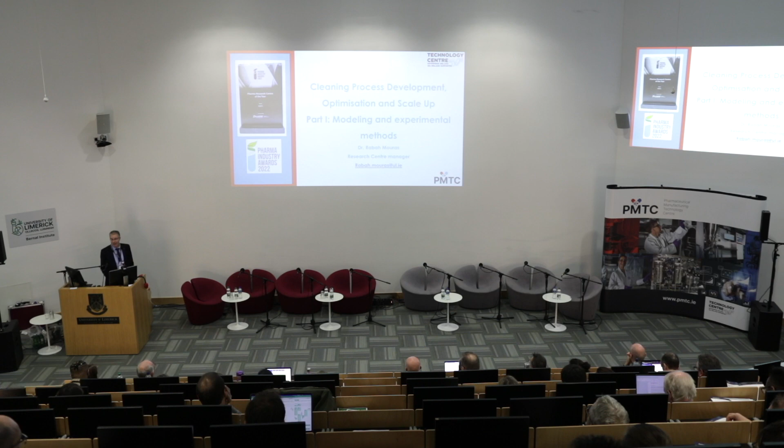My talk will follow this outline: the cleaning theme and the impact we've achieved, the cleaning core project Spotless, and a few words on the PMTC Good Cleaning Validation Practice Guide, finishing with the conclusion.

A few years back we had a survey that shaped our cleaning themes within the centre. The question asked was: what issues are facing the pharma industry in Ireland? There were three themes - cleaning, process, and data - with cleaning coming out on top at about 44%. So I'll just focus on the cleaning theme.

We'll talk about how we use fundamental science to help our industrial members develop more efficient and sustainable cleaning processes, and then how we do process optimization and scale-up.

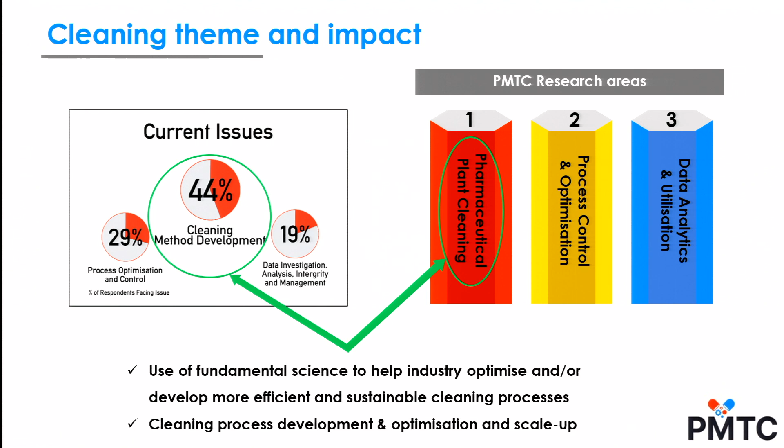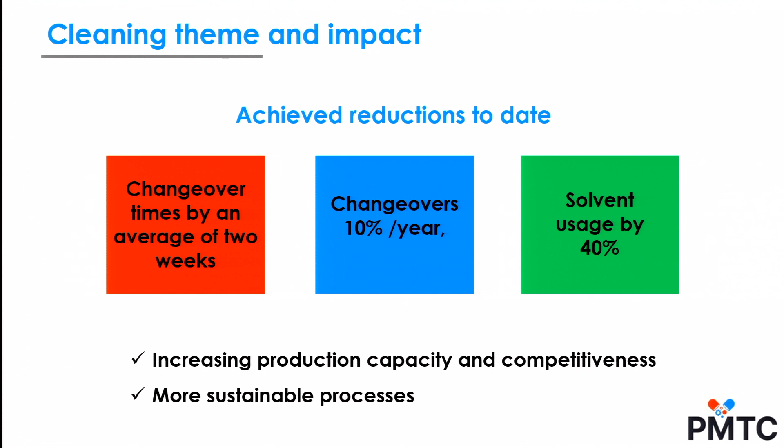Through the years we've achieved great impact. We reduced changeover time by an average of two weeks, and changeovers by about 10% in a year. We've also been able to reduce solvent usage by about 40%. These outcomes have made a great contribution to increasing production capacity and competitiveness of the pharma sector, feeding straight into more sustainable and efficient processes.

I'll go through our core project and tell you how we achieved those impacts. As Sarah mentioned, there are many funding streams and ways to collaborate, including Enterprise Ireland funding and contract research, as well as using research components from our members to do the core research.

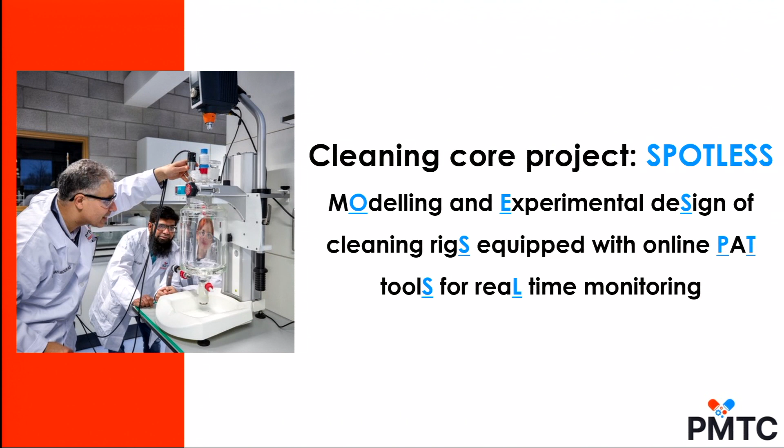Spotless was one of the first approved projects in this phase, which is about using modeling and experiment to design cleaning rigs, where we can do optimization and study all the fundamental sides of cleaning, and then how we introduce and use PAT tools for real-time monitoring and verification.

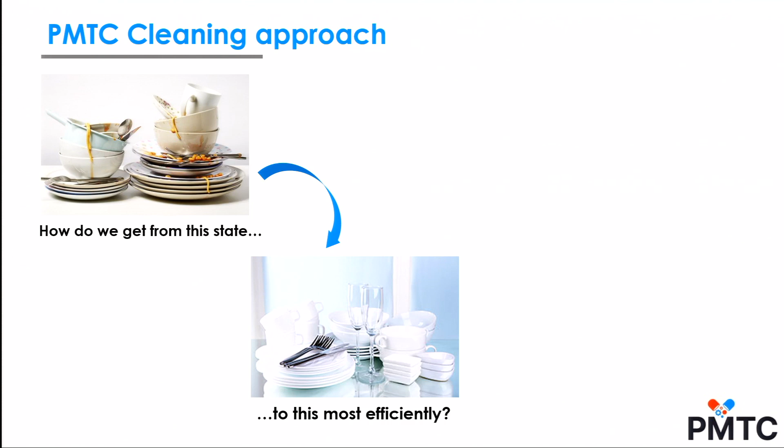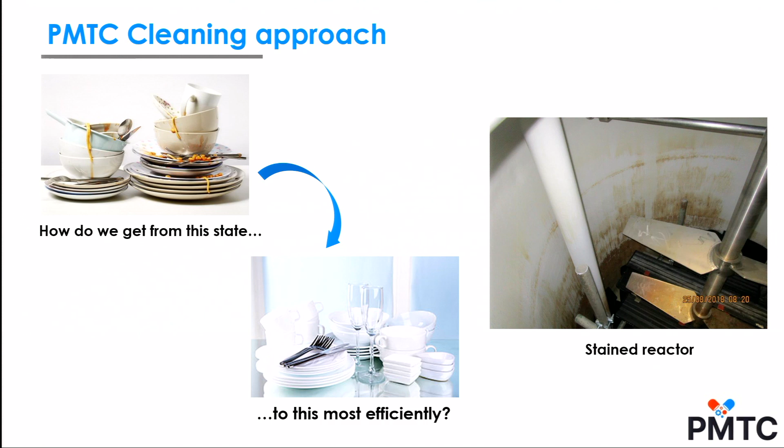So cleaning, our approach in PMTC, is how to go from this state to this one most efficiently, in less time. So that's in a restaurant or a kitchen, but in real life, this is what you can get after a process. You have dirty vessels, and they have to be cleaned efficiently, while also looking into safety issues.

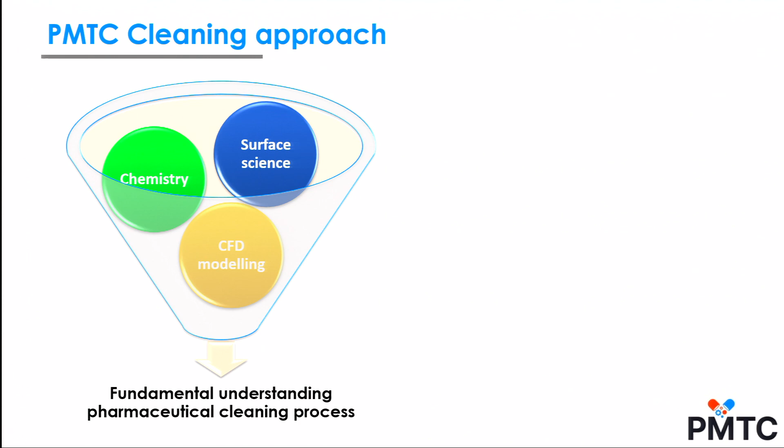Our approach in PMTC is built on three pillars, to have a fundamental understanding of pharma cleaning. First, we look into surface science: how the surface of equipment and different materials interact with residues, and how those residues adhere and can best be removed. We also look at the chemistry, either of the residues we're trying to clean or of the cleaning agents, whether organic solvents, detergents, or aqueous solutions. And we use CFD modeling to find the best way to deliver those cleaning agents, including flow rates and cleaning times.

We start our methodology with modeling, screening for the best cleaning agents based on solubility using computational techniques like COSMO or Hansen solubility parameters for fast screening. Then we use CFD modeling to inform the optimum delivery methods. After selecting the best cleaning agents, we move to the experimental side: we measure solubilities, characterize our residues, and run cleaning trials to see if our recommendations achieve what we wanted.

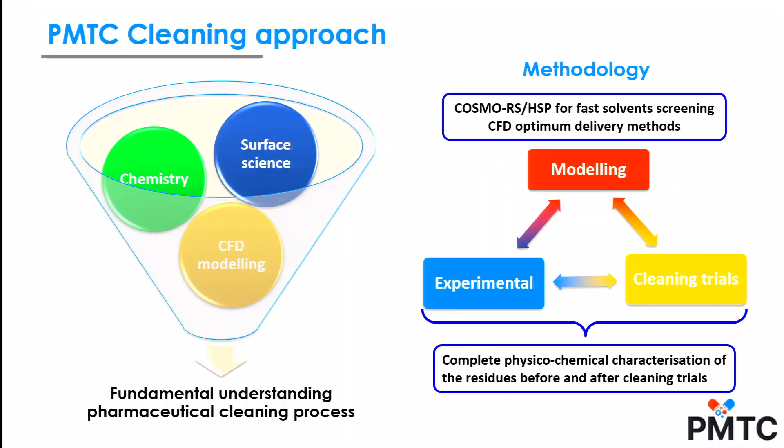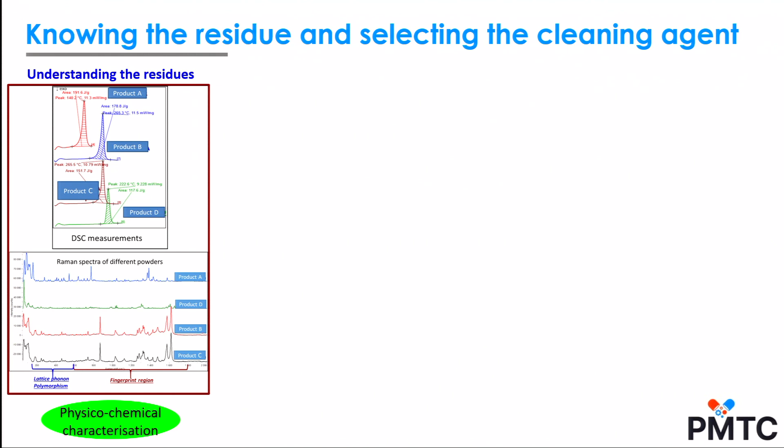We have the privilege of being at Bernal and the University of Limerick, with access to some of the world's best state-of-the-art characterization suites, allowing us to do complete physical-chemical characterization of residues before and after cleaning trials. We like to establish a time zero - we stamp and characterize exactly how our residues look initially, so we know that baseline.

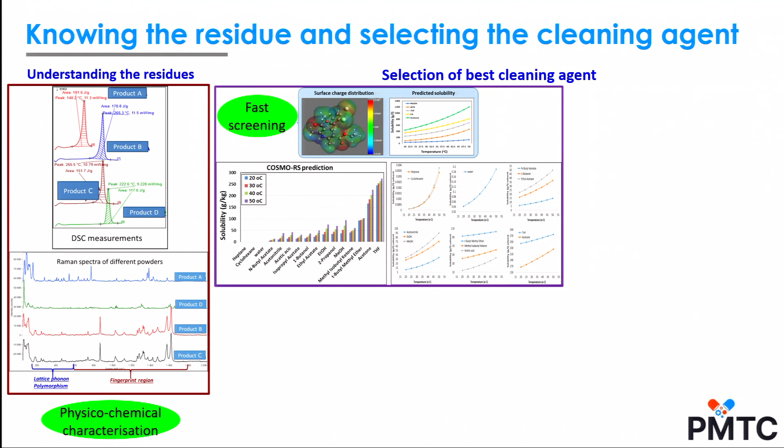We do our selection and screening for the best cleaning agents based on solubility, and we can see a trend using temperature - solubility may increase by a factor of 2 or 4 moving from 20 to 30, 40, or 50 degrees, if that's usable in the cleaning process. We take our measurements as usual, select solubilities, and check stability, because it's important to keep the integrity of the residue. If there's degradation or chemical reactions, and we're verifying using offline methods like HPLC, we might end up looking at different molecules entirely, so we have to ensure there's no degradation happening.

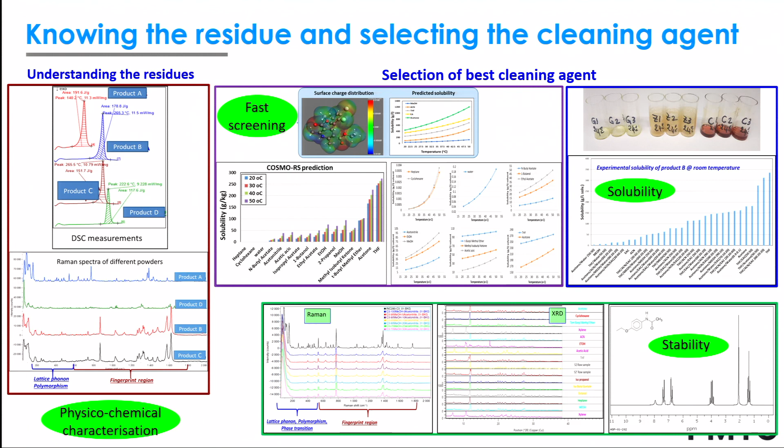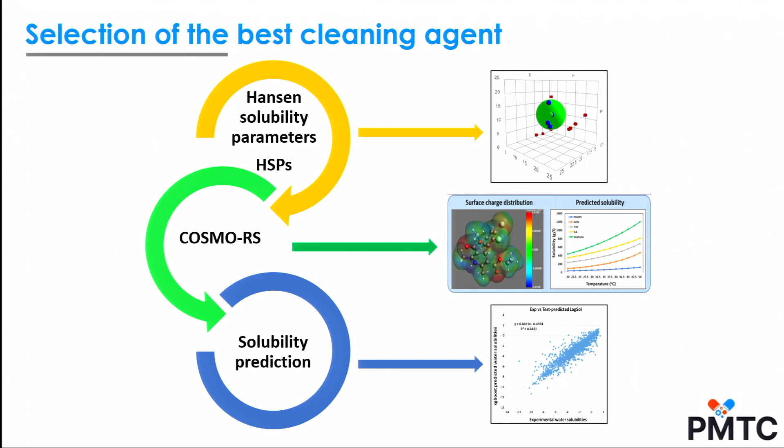One objective of the Spotless project is to find a way to build a model that helps us cluster all the chemicals and solvents, so that before going to the lab and doing experimental measurements, we can predict solubility and cluster chemicals in a more efficient, accurate way. We achieved that during this project - we're able to predict the solubility of residues of chemical entities with 90% accuracy, just by looking at the physical-chemical properties of the molecules, without doing an experiment.

I can show you the results here: predicted versus computed values, with an R-squared of about 0.91, which is a great achievement. In the middle figure, you can see we classify a good number of molecules according to their solubility using the pharmacopoeia scale, going from slightly soluble to very soluble. That was really good.

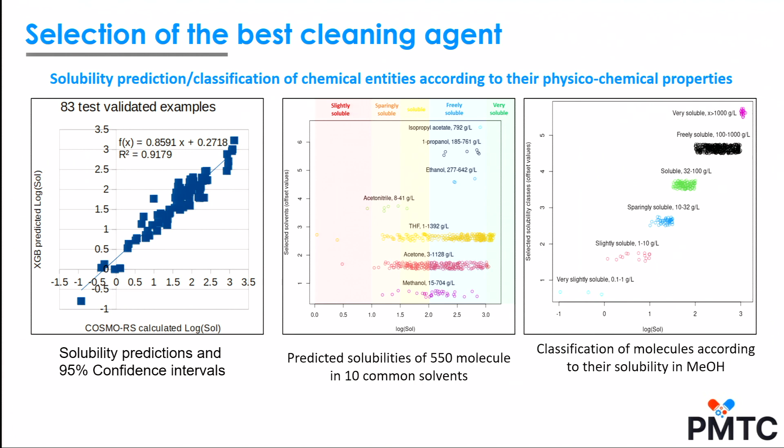We did this for over 550 molecules in 21 solvents, though here we've selected just 10 common ones used in pharma for cleaning or processing. For example, if we wanted to use methanol for cleaning, we can cluster molecules according to their solubility, giving us a great idea before going to the lab for selection. This saves huge amounts of time in optimizing cleaning methods.

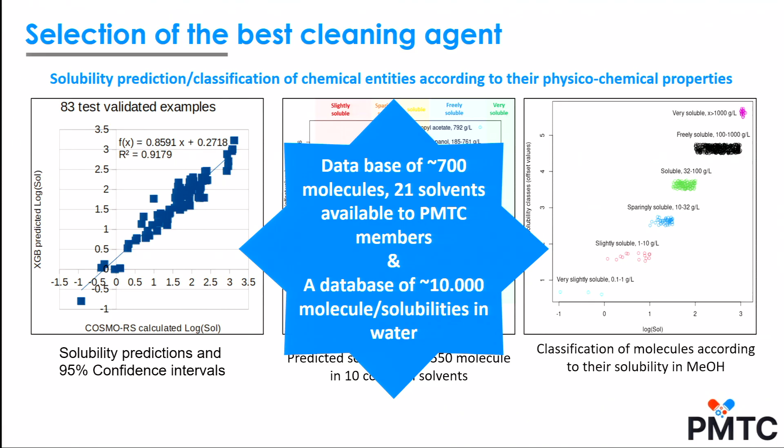We already have a database of 700 molecules in 21 common solvents used in cleaning, and these are available to our members through the Spotless project. We also built, as a test and validation of the database, a set of over 10,000 molecules used in simulation, but in this case we just used water. It's possible to do the same thing for organic solvents.

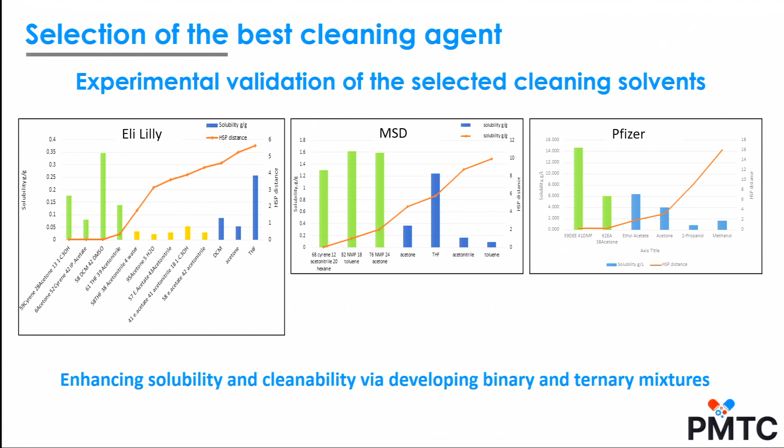After that selection, we go and validate that experimentally. We did that on a few molecules from our partners, and we showed there was enhanced solubility and cleanability of those molecules. I'll show later the cleaning trials via developing mixtures using binary and ternary systems.

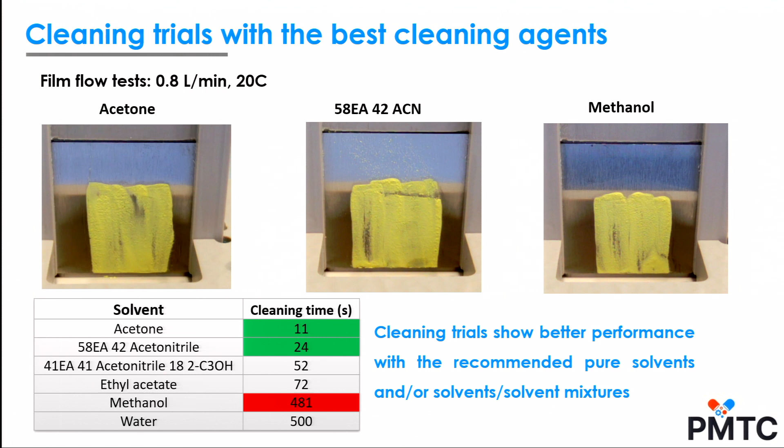After we select the cleaning agents that we think are the best, we do our cleaning trials. What you can see here is that the recommended cleaning using the modeling and the experimental are outperforming methanol, which is the common organic solvent used in cleaning.

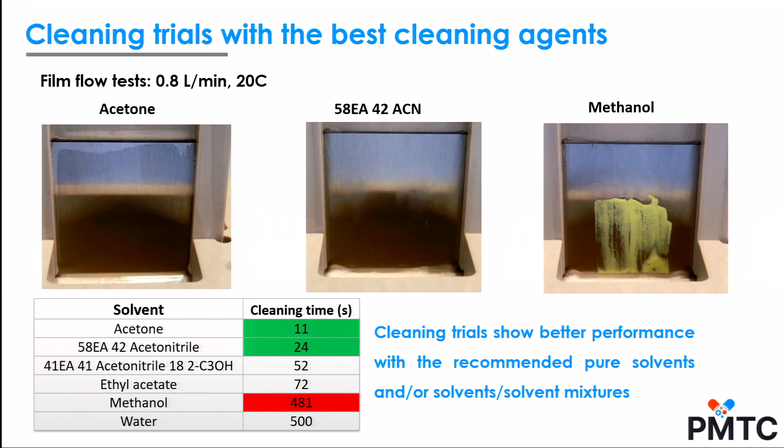You can see we clean the coupon using acetone in 11 seconds. The ethyl acetate and acetonitrile take 24, but methanol took about 44 times longer, 481 seconds.

The other objective of Spotless was the development of an online technique to monitor and verify the cleaning in real time. We tested different techniques using UV-Vis, Raman, FTIR, and NMR, and found that UV-Vis is the best tool to use because it's the most sensitive, with a low LOD of 0.1 ppm and LOQ of 0.4 ppm.

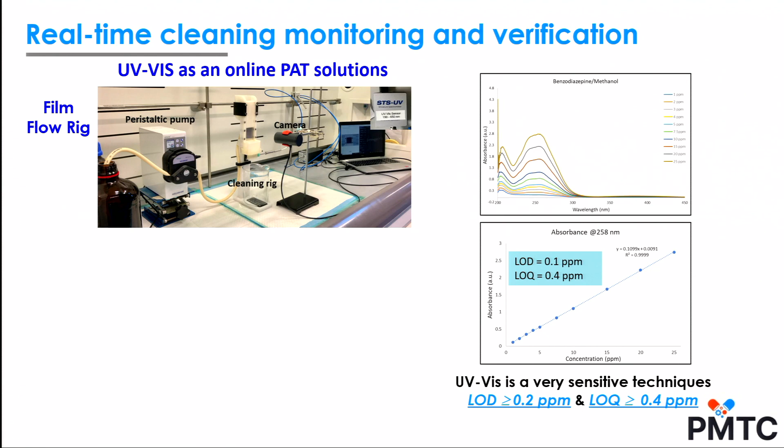So we opted to use that, and we designed our cleaning film flow rig using CFD, thanks to OREST for providing all the data on scale-down, to have the right size of coupons and the right flow rates that can be scaled up later on and used in plants for cleaning big reactors.

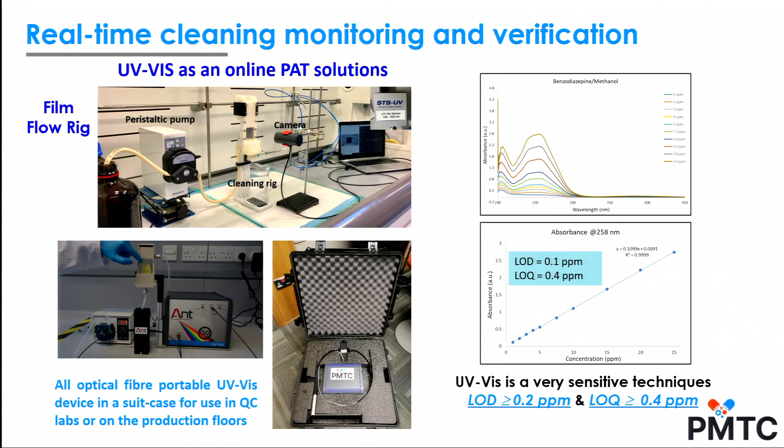It can be used in the QC lab, or taken out on the floor for cleaning verification and rinse recovery as well, depending on the application you'd like to use.

I'll give you an example of how we use the film flow rig combined with PAT for real time measurement. While we are cleaning, we measure at the same time the concentration of the dissolved molecules, reading it in real time. This gives us a profile, which we integrate to get the amount cleaned.

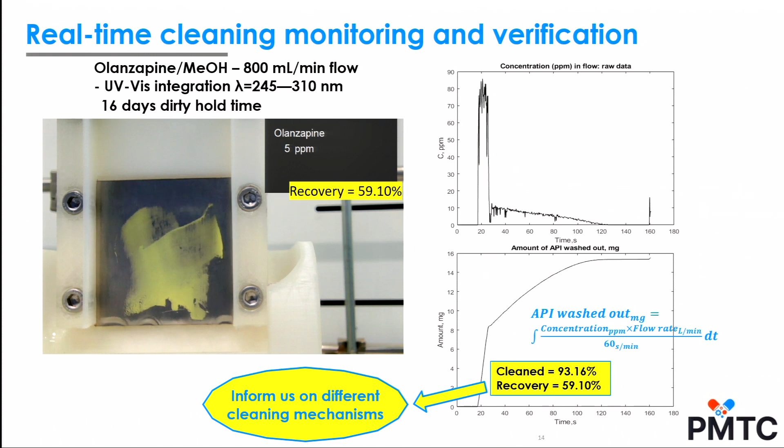What I've seen is there's a lot of lift-off, which may happen in the gross clean. So we developed another technique using an optical camera to quantify both how much we remove by dissolution and how much we remove just by shear-off. Nicholas will talk more about that, since he used it for optimizing the cleaning parameters.

Of course, we double check every time that there was no effect on the molecules: no degradation, no coloration, no polymorphic changes. We can use a fast measurement with Raman straight away, which takes a few minutes, or go to the SEM to get more detailed pictures and confirm nothing has happened. So this is our learning curve in the lab, but we would like to optimize that and take it further to be applied in the plant.

As I said, we use two techniques. The first is CFD modeling, and the team working on that helps us design flow rates, wettability, and estimation of cleaning rates by dissolution in film flow, with the outcome used for scale-up. In analogy to the Sinner circle, we can also optimize this using the film flow rig, where we can change different parameters.

We can vary the mechanical flow rates, or the chemistry, different concentrations or different combinations of organic solvent, or maybe the temperature. This allows us to find the sweet spot where we can use less time, less detergent or less organic solvent, less heat, and get the best outcome.

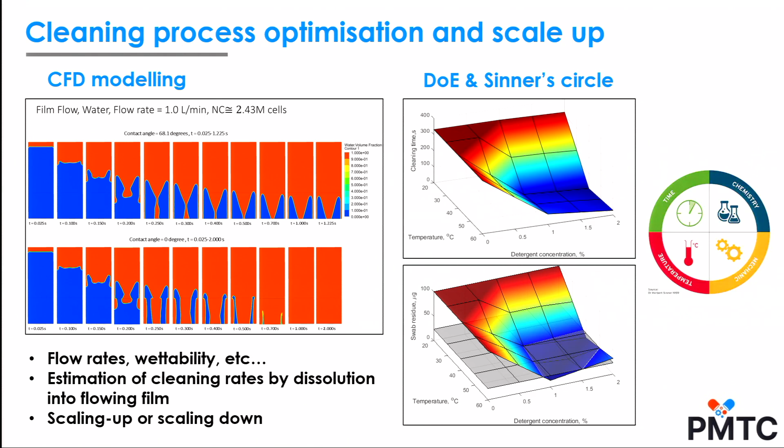If you see on the second figure here, with those optimized parameters we've been able to clean at less time and low temperature, 20 degrees, less concentration of detergent, and we are below the VRLs that we have measured in the lab.

And once we have done that, we have to scale up, and we use the pilot plant, a CIP rig, and Sarah has mentioned that.

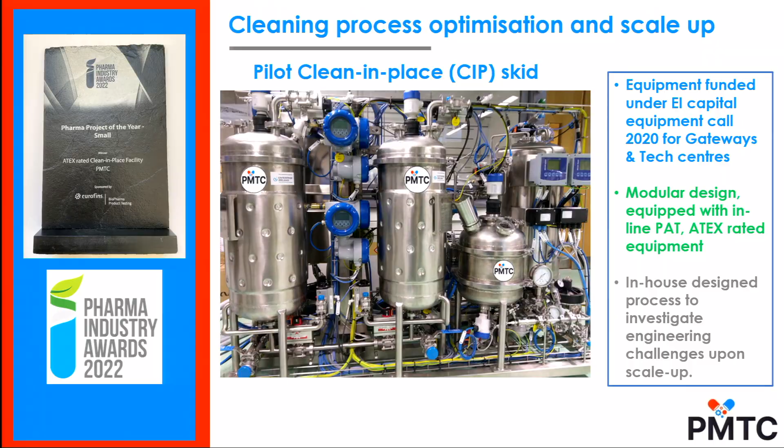We're really proud that this project won the Pharma Award. Thanks again for the funding from Enterprise Ireland that allowed us to acquire this unique facility, which we offer to our members to access, either to optimize their cleaning methods or to develop new cleaning methods, using the film flow rig and then scaling it up to the rig, which is modular and can accommodate different types of cleaning agents and different materials.

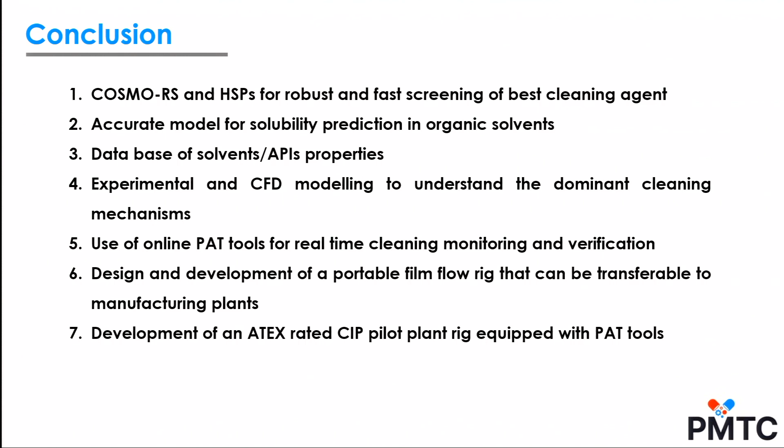Finishing up: we have developed a database for clustering chemistries and cleaning agents that is accessible by our members. We have combined CFD and experimental work to understand different cleaning mechanisms. We use PAT technologies, and we have designed a film flow rig. We are using it here, but we are happy to give it to our members if they want to use it in their plants to design their own cleaning methodologies. And of course, lately, there's the design of the ATEX CIP rig that's also accessible.

Big thanks to the PMTC team, our Spotless members, industrial members, as well as the people who have worked on the guide, and thanks to the funders. Thank you.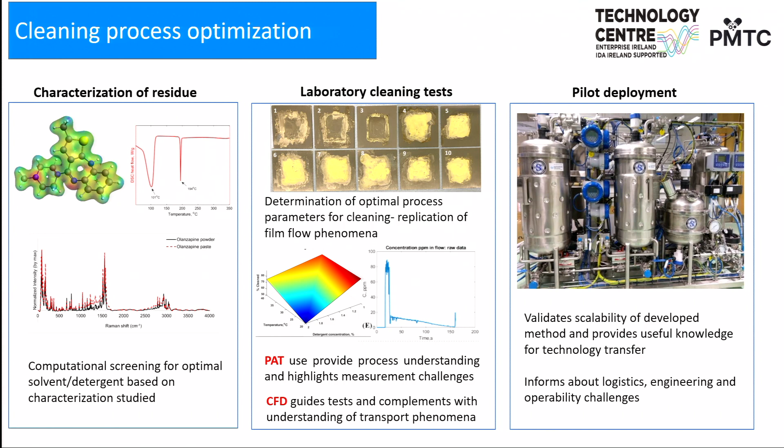I'm talking about, for example, deposition of sediments in the pipes, foaming in the tanks, the effect of different pumps, crossing in the valves, etc. There's quite a lot of challenges that might happen upon scale-up, so that's a very useful tool for us to validate that what we're developing or proposing to industry can actually be easily replicated on a larger scale.

Speaking a little about the bench scale, we started off with the first picture on the left, which is a dipping test. That's a very gentle cleaning testing technique where we screen purely for the chemical action, so just temperature and solubility or dispersibility. We have steel or material samples, called coupons, that we coat with an API or a chemical entity, and we dip them gently in different cleaning agents at a set temperature. That allows us to compare the chemical action of each.

That's a very fast screening technique, but it's just an informative first step. It's not really replicating what happens inside a process vessel, let's say under CIP conditions.

So then we move next to the film flow, where this film flow cell was actually designed to replicate the film flow that happens within CIP. Basically it's a falling film that develops on a vessel wall, and that's the weakest mechanical phenomenon happening in a CIP vessel, because you have the jet coming from the spray ball, and then you have the film flow falling on the walls, and that's the weakest part, so that's a bottleneck for cleaning. If we investigate this, it allows us to optimize the whole process.

We use in situ PAT and visual analysis to also help us understand different mechanisms governing cleaning. CFD also complements this work. It gives us information on the transport mechanisms and guides us a bit on how to select the best flow rates and what flow profiles we get.

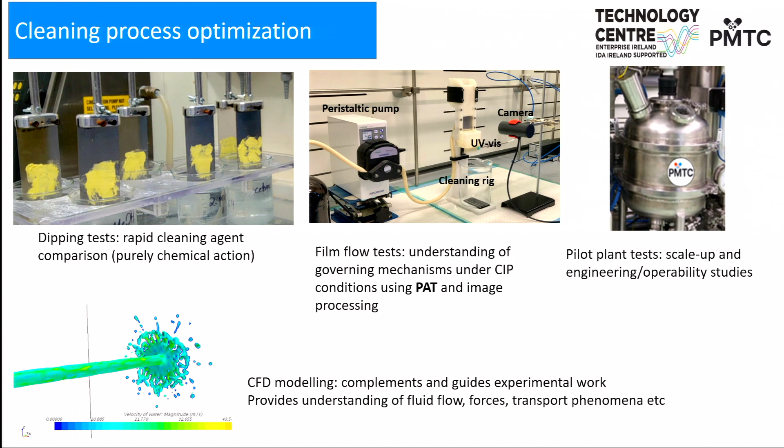I'm showing as an example here a snapshot from a CFD simulation by Aris and Mohsin, which shows you what happens to your shirt when you try to wash a spoon in your sink - a big splash. This is a jet impinging on a vessel wall.

And then once we've done all of that, we've selected the best process parameters, the best agent, we scale up to our pilot plant. Now under the film flow, what we do is we use UV-Vis inline to measure the concentration of the dissolved species in the solvent.

By integrating that, it tells us how much of the soil on the surface has been dissolved over time. And by taking an image of the coupon under cleaning - just like the videos that Traba showed in his slides, where we see the cleaning happening - by analyzing the images we can actually measure the surface area of the stain and see how that changes with time. We can more or less relate it to the weight, which tells us the total amount removed from the surface.

By comparing both, or by subtracting them, we know the relative importance of the dissolution action and the mechanical phenomena - mechanical removal, we can call it shearing or lift-off, but basically it's everything that's not the dissolution action. We can study the relative effect of both phenomena as a function of our process parameters for different cleaning solutions.

One of the interesting findings from this study was that in cleaning processes where the dominant phenomenon is mechanical removal more than dissolution, sometimes it can be very efficient, but it's always plagued with very high variability, so the reproducibility of the results is lower. So although it's sometimes a compromise to rely on a more solubility-driven cleaning process, in terms of validation it's probably more advantageous.

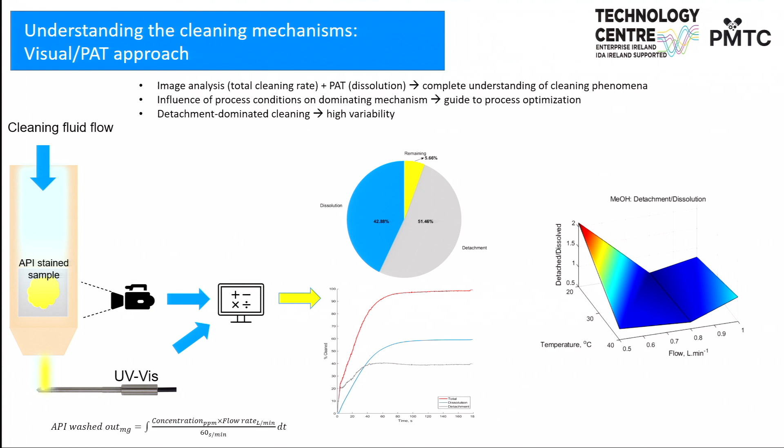So as a case study, we looked at developing heat maps for cleaning an API with detergents. We screened for detergents and selected one detergent for the study, and we studied the effect of flow, temperature, and detergent concentration on the cleaning time and the cleaning percentage, by measuring the weight that was removed.

We also did swab analysis on the surface after cleaning to validate that it's actually clean. We were able to identify the sweet spot that Traba highlighted, and prove that under optimal process parameters, it falls below our cleaning limit.

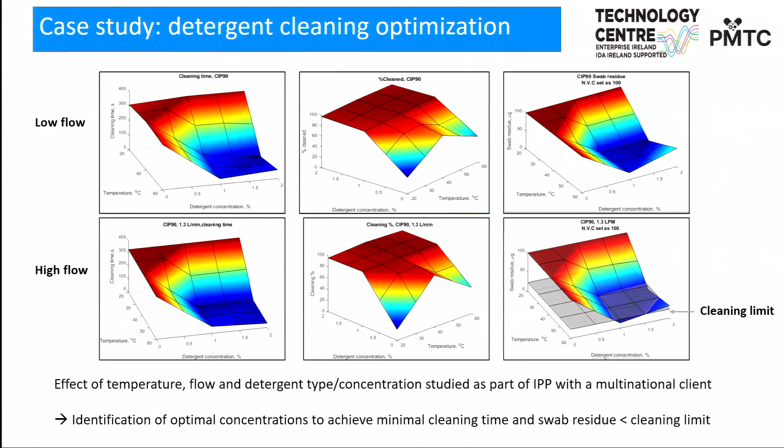Then finally, we scale up our work and move to the award-winning ATEX rated CIP rig.

Sorry, I have to take this chance to brag a little bit.

So we haven't had a chance to actually describe it, what it looks like. We have in that plant two holding vessels that are jacketed, where we can hold either detergents, pure water, or solvents. They're vented, and the whole system is ATEX rated.

So we feed those to our CIP testing vessel, which is the small vessel on the right you see in the picture. In that vessel, we can investigate different materials of construction, because that vessel is actually built of three parts that are interchangeable.

So we can swap out middle sections, so we can coat them with specialized coatings, Teflon, steel. We can look at different materials of construction. We can look at different APIs, and we have different flow configurations as well.

So we can either operate on the recycle or straight through. And we can modify the spray ball geometry, so the position of the spray ball in the tank, the type of the spray ball.

So it's a very, very versatile rig that we've designed specifically to be able to replicate as high a number as possible of scenarios that might happen in pharmaceutical plants.

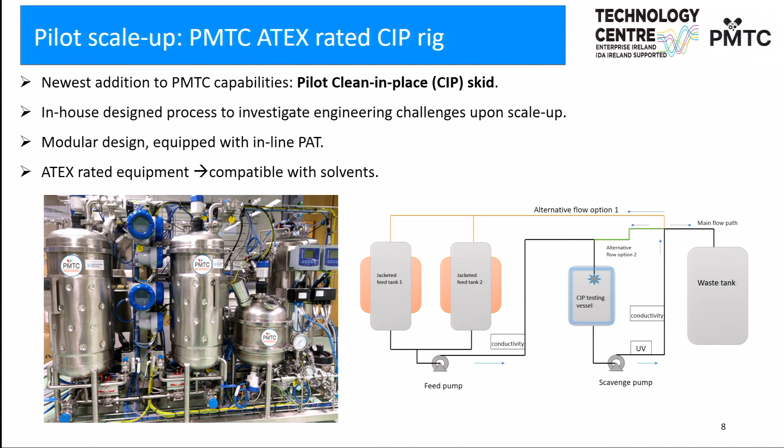And this rig is equipped with PAT inline, so we have a UV-Vis inline downstream of the vessel. That allows us to look at dissolved API when we're doing solvent or aqueous cleaning in real time as well. So the same information we get on the bench scale, we're able to get from this pilot plant.

But also this tells us a lot more about the suitability of different pumps for when we're pumping detergent solutions, if there's foaming, pressure drops. So that's a very useful tool for us to validate the scalability of our methods.

Because we might, for example, select a flow rate that is maybe too low or too high on the bench scale, but would that translate to the plant? Would we be able to form a film efficiently at the flow rate we've chosen? Would the pressure drop in the lines be sufficient?

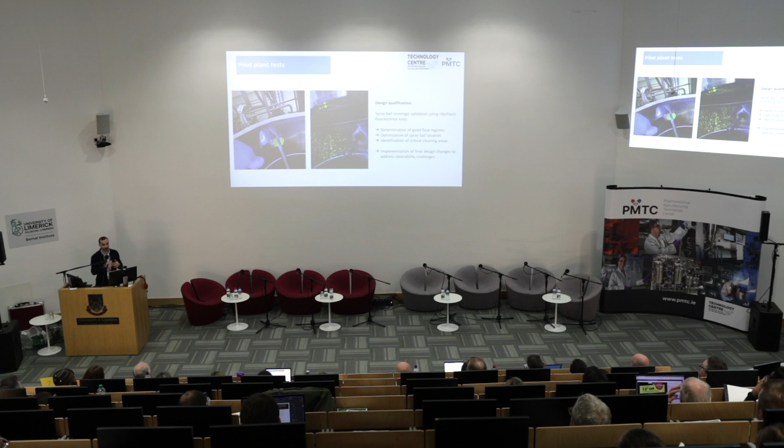So I'll wrap up quickly. What we're doing here is the first step is design qualification. We can also do that.

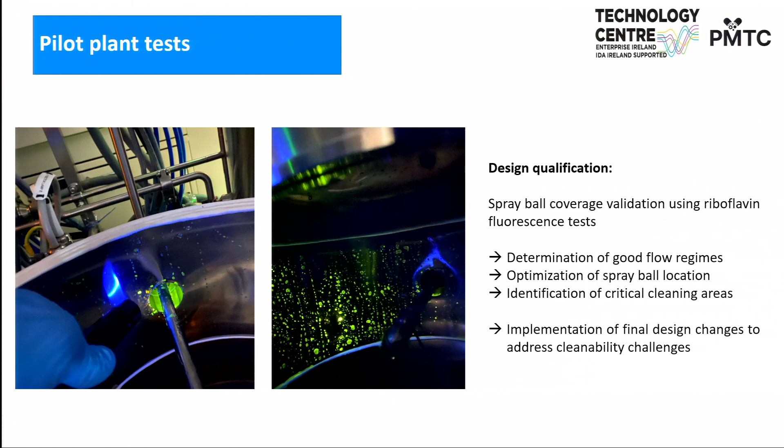We do riboflavin coverage tests, and that allows us—so we wash off riboflavin from the vessel, and we look at it with a UV torch, and that tells us if there are any hard to clean areas. We've identified a few, and we're actually in the process of changing some parameters in the rig to address that.

Finally, I don't have time to show you this video, but we did a test cleaning paracetamol, for example, and that's the PAT, the UV profile we get from the vessel. So we have an initial cleaning spike, then a steady state dissolution removal, and then a final decay once the tank is clean.

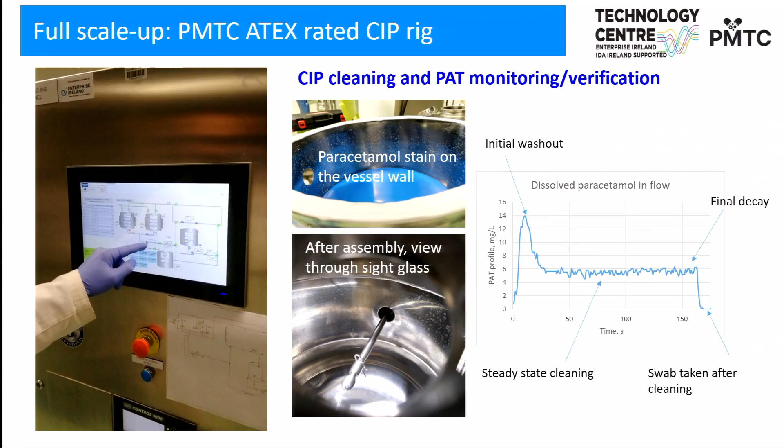And if we compare that to what we get in a film flow cell, we see that for easy soil, which is lightly coated and easily soluble, we have scalability, which is good news as a start.

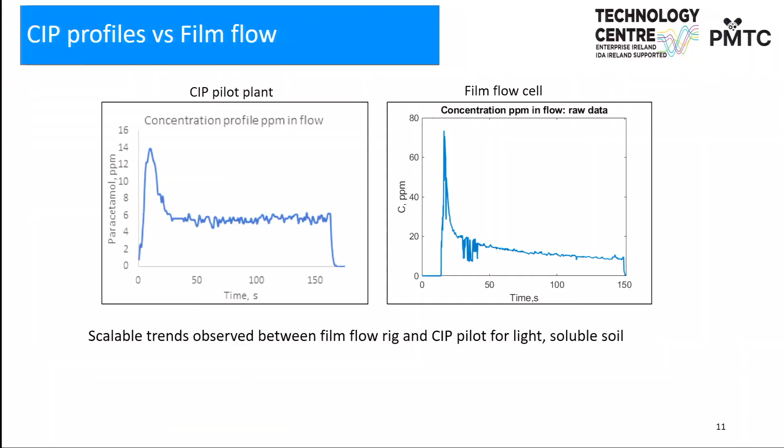So in conclusion, the Spotless project basically looks at a comprehensive approach to optimize the cleaning process, starting from computational work, solvent screening.

And then development of the optimization of the process conditions on the lab scale, and then translation to the pilot plant. And basically, we predict that it will be very impactful for the pharma industry.

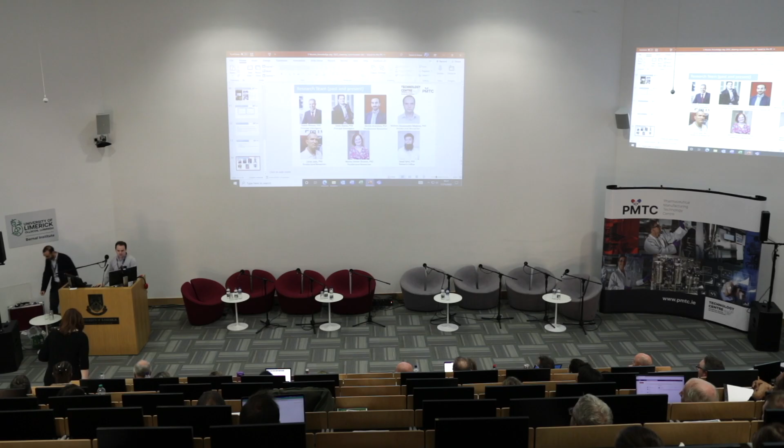Just take a moment to introduce Dr. Orest Shardt, who's working in computational fluid dynamics, lecturer in transportation and fluid dynamics systems. You speak to it better than I. Yeah, so over to you, Orest.

Thank you. Thank you very much, Sarah, and it's a pleasure to have a chance to speak in this room. I know after a few years, the only opportunities I usually get to speak in this particular lecture room is when I'm teaching second-year students about product design.

So it's a very different audience today, and a pleasure to have a chance to introduce and present some of the work that I've been doing in computational fluid dynamics, both within the Spotless project, which recently wrapped up, and now within the Impress project.

What I'd like to talk about today: give you some of the background, some of the theoretical background about how we predict cleaning rates within vessels and within model systems, such as that film flow rig that was presented. So I'll give you some theory background, not a chalkboard talk here, but some of the theory.

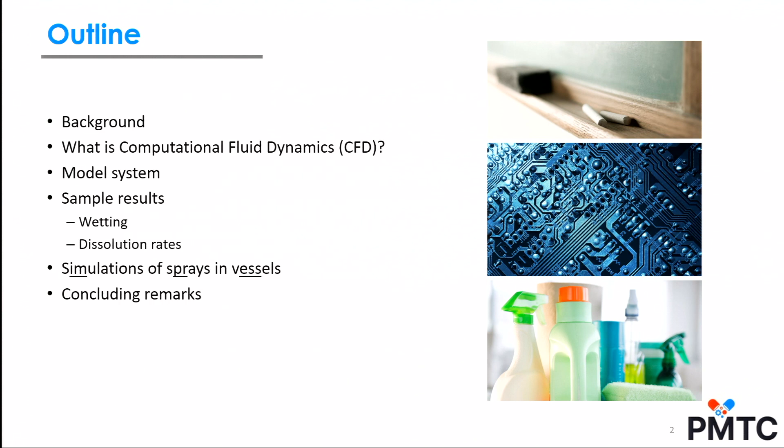Then we'll look at computations—how we use numerical schemes to solve the equations of fluid mechanics and make predictions about cleaning rates. We'll introduce the model system, with some details about how we scaled down from full vessel scale to a 2-inch wide flow channel.

I'll give you some sample predictions and results for the computed fluid flow and predictions of the cleaning rate, and then a few slides about the Impress project, which covers simulations of sprays in vessels.

I'm sure many of you who work in cleaning are familiar with Sinner's Circle. We look at the different phenomena that contribute to determining how cleaning progresses. Does a particular process involve high temperature to improve the rate of cleaning? How long does a given process take? Does it rely on mechanical forces, shear stresses applied to a surface? Or does it perhaps rely more on chemistry, so dissolution or reaction of the soil?

The general goal of the computational fluid dynamics theme within the cleaning part of PMTC is not to have qualitative judgments of the relative importance of these different phenomena, but rather to quantify them—to make predictions about the rate of cleaning due to mechanical effects, the rate of cleaning due to chemistry, so due to solubility, and what we call transport processes.

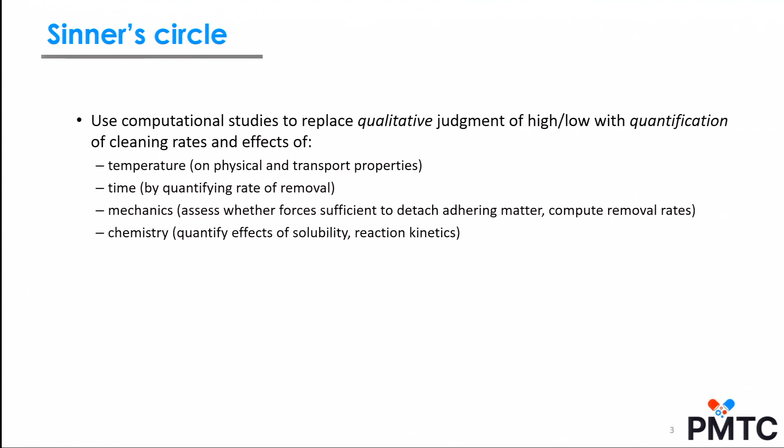What have we done over the last few years? CFD within PMTC started with the EI IPP project, 2017 to 2019. Highlights included studying a jet impinging on a surface, flow within a T-junction to understand cleaning rates in the dead end of the junction, cleaning rates within a stirred vessel, and a film on the upper surface of a vessel—how it falls down that surface and then detaches.

Since then, we've had the Spotless project. You've seen the experimental side of it. What I'd like to do today is introduce the simulations: how we predict the fluid flow coming down the coupon, and what the cleaning rate is.

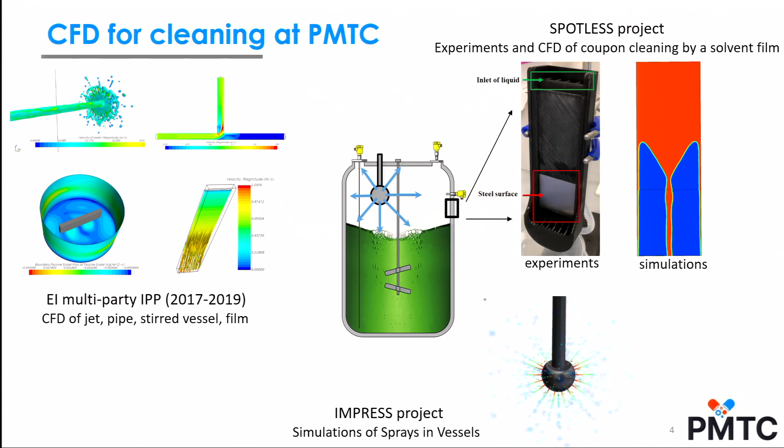Now we've moved on to larger scale. We started with exploratory studies of full industrial scale problems, looked at a model system—a 2-inch wide ramp—and now we're looking back at the full vessel scale. These are 4,000 or so liter vessels, and we're modeling the distribution of a spray within that size of system.

Just a brief reminder of what happens when we try to clean a surface and how this dissolution process works. Think about putting a sugar cube into your coffee or tea. The moment you put that sugar in, if you don't stir, the sugar cube falls to the bottom, and the first layer of sugar molecules dissolves into the liquid. Those molecules are then stuck there at the surface, forming a saturated solution adjacent to the solid surface. The only way those molecules can move away and allow new molecules to dissolve is by diffusion—their own Brownian random motion.

How can we accelerate that? The answer is by flow. We bring fresh solvent towards the surface, which displaces that layer of saturated solution near the surface and brings in fresh solvent, allowing faster dissolution of the solid that's there. So we can clean the surface—we can dissolve the sugar faster. In terms of cleaning, that means we clean the surface faster because we have fluid flow.

So we can't rely only on solubility of the substance. Yes, that's the first step, and having high solubility is very important. But in addition to high solubility, we need good transport of the dissolved solute away from the surface, by bringing in fresh solvent.

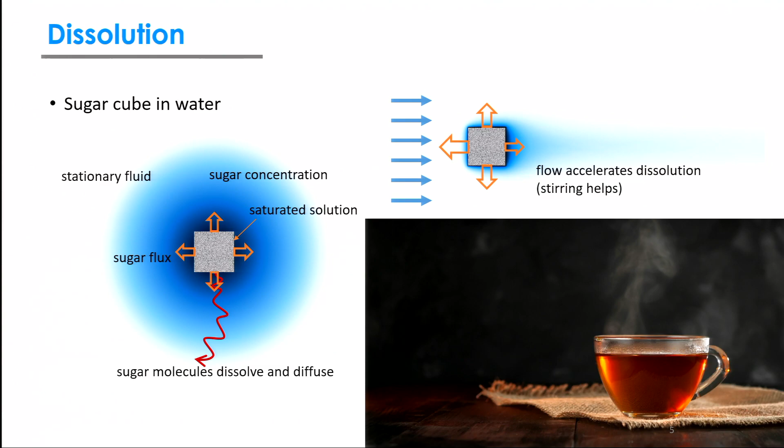Briefly, what is computational fluid dynamics? It means dividing whatever problem we're thinking about into millions, maybe billions, of small cells. If you think about this room, we could grid it down to perhaps tens of centimeters, or a centimeter-sized grid, depending on the problem. We break up the full system into very small cells, and in each cell we solve the equations of motion.

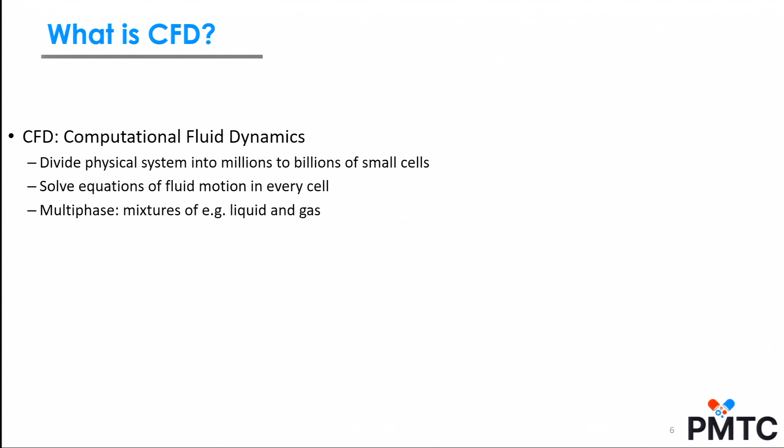Think Newton's laws: force equals mass times acceleration. How does the fluid accelerate? Because of the forces acting on every cell due to the adjacent fluid. We work with mixtures—gases, solid surfaces, and liquids—so we need to keep track of what's occupying any given cell. With liquid and gas mixtures, we have to track that surface and include surface tension, since surfaces tend to contract due to it. We have to include that effect in these simulations.

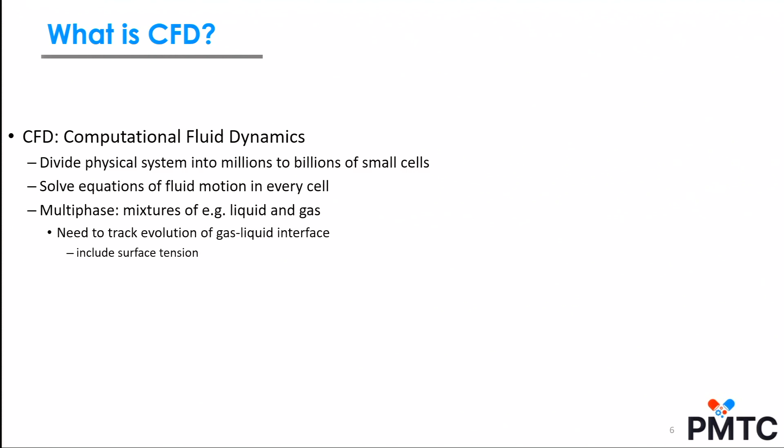As an example, you saw that impinging jet. I'll try to speed it up a little to see the interesting part where it hits a surface.

A sample calculation that takes into account surface tension formation of droplets as they hit a surface. What do we use CFD for within cleaning? We want to predict the fluid flow structures and the cleaning rate, and how we bring fresh solvent past a surface, and what's the resulting cleaning rate.

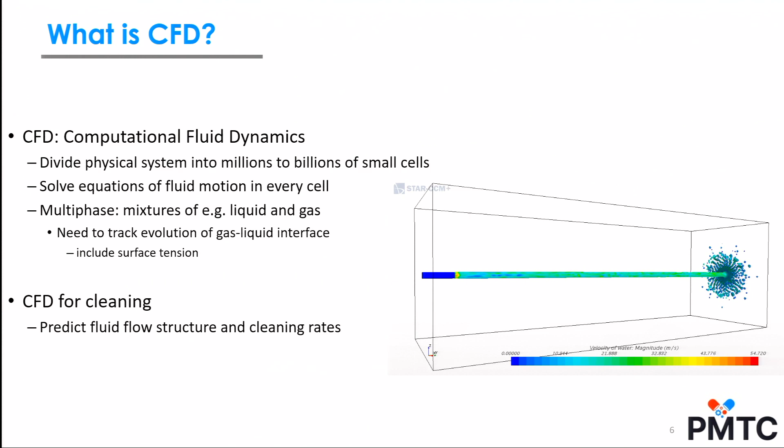The model system we work with is paracetamol, largely because it's well characterized, relatively innocuous, only a painkiller effectively for us. So it's good to work with in the lab and good to work with computationally because we know the solubility and properties like the diffusion coefficient.

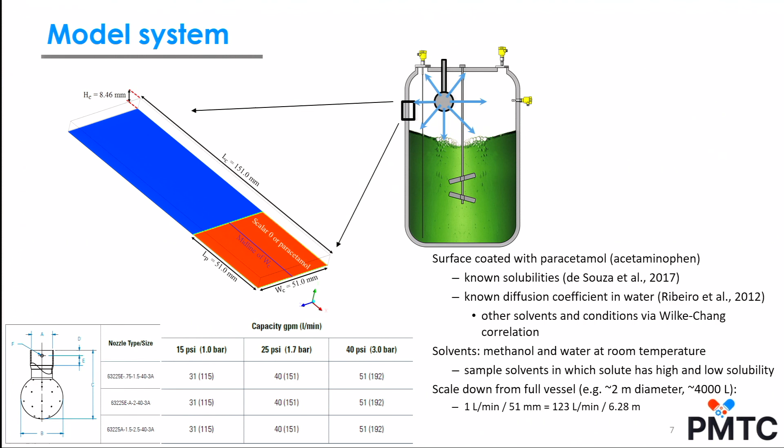In terms of scale down, we can take a typical flow rate for a typical pressure through a spray ball, take that total flow rate into a vessel, divide it by the circumference, and get how much is flowing down a 2-inch width along the side of a vessel. So if we have 1 liter per minute, as you saw approximately from Raba's and Nicholas's presentations, 1 liter per minute over a 51 millimeter wide channel is 123 liters per minute for a 2 meter diameter, roughly 4,000 liter vessel.

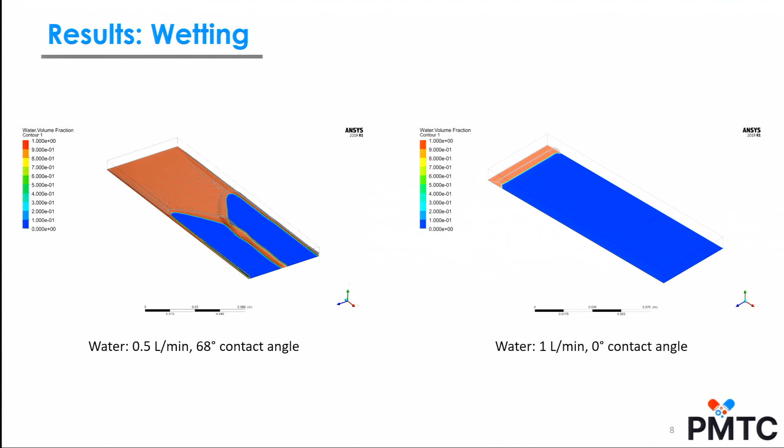Sample results showing the effect of wettability. If we only inject about half a liter per minute on this coupon and the contact angle is 68 degrees, representative of the polymer 3D printing used to make this slide, we see it doesn't wet that surface very well. In fact, it's not very good for cleaning. You need a higher flow rate to ensure the whole surface is wetted, so you're not just cleaning rivulets coming down along the circumference of your vessel.

If we raise the flow rate, then we get full cleaning. Also, in this case, we don't care so much about the wetting because we know the flow rate is high enough that it fully wets the surface, so we drop the contact angle down to zero. We're not interested in the wetting effect, but if the flow rate is higher, we get full wetting, and then we get appropriate conditions to study cleaning.

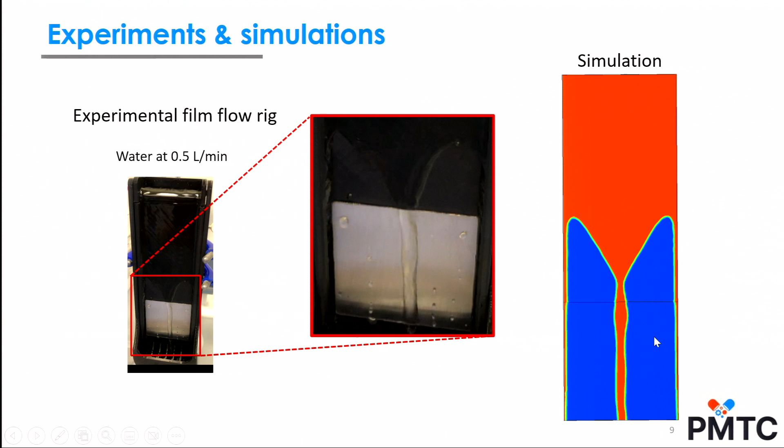What we're actually interested in is that dissolution effect I've been talking about. So what we'd like to do is zoom in on what's happening if the coupon is fully covered with liquid, right at the surface. As with the sugar cube dissolving, the same applies here: the paracetamol soil on a surface dissolves into the adjacent liquid and gets carried down the flow.

In the simulations, we see all the details of what's happening. We don't have to try to have a special microscope to see these things. It comes as a direct consequence of our calculation. So we can track, for example, how quickly this bottom coupon gets wetted.

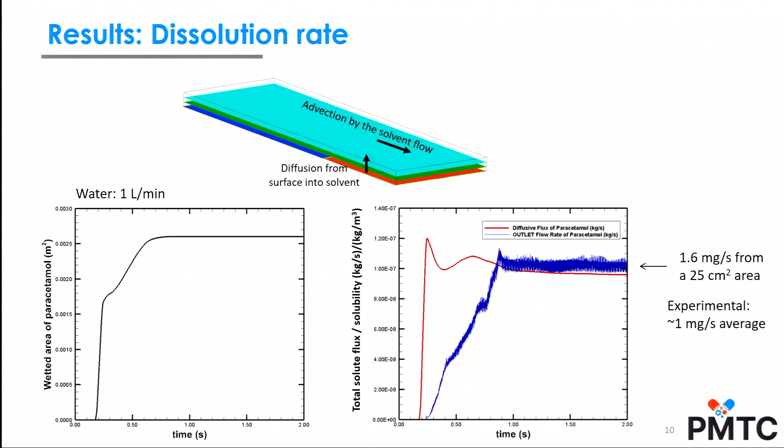Comparing predictions quantitatively, we see we're predicting around a cleaning rate of 1.6 milligrams per second from that region, whereas in experiments we see around 1. So fairly good given the approximations involved here.

Then I'd just briefly like to introduce what we're doing next. We've had very nice success in predicting what's happening along a small coupon, but what happens in a full-sized vessel? That's our next project, and that's the Impress project.

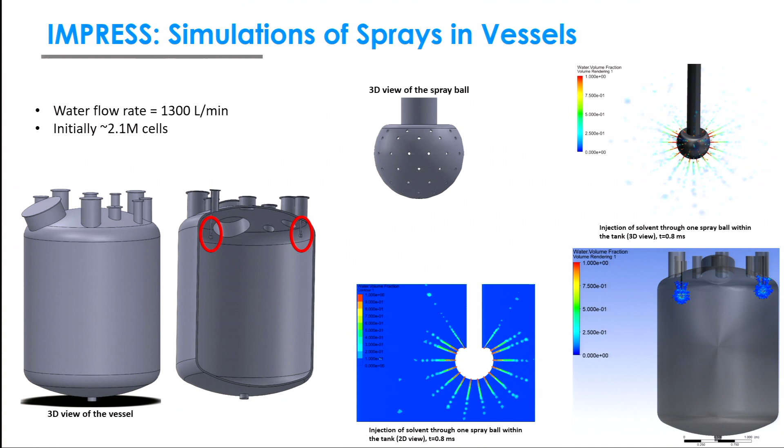Now scaling up, near the maximum flow rate you could get through a spray ball, 1,300 liters per minute, we run these simulations with 2 spray balls within a full-sized vessel. I show here a few snapshots. We only started this project a few months ago, just setting up the meshing and the geometry. So we only have 0.8 milliseconds of calculation at this stage, but still we see already in this small time the establishment of the spray coming out of the spray ball and the development of the spray from that position.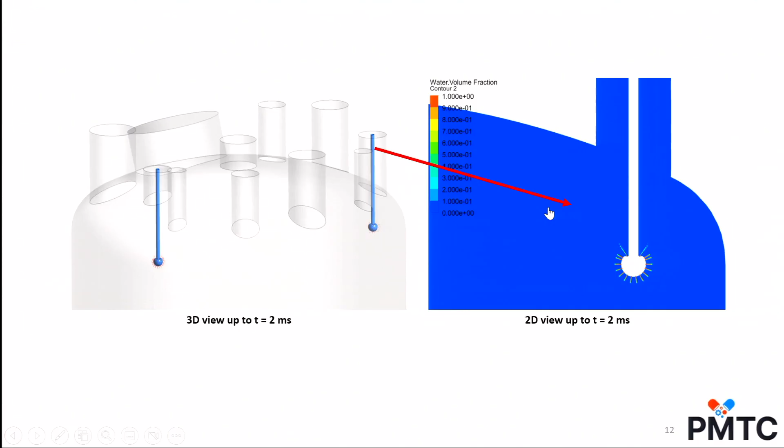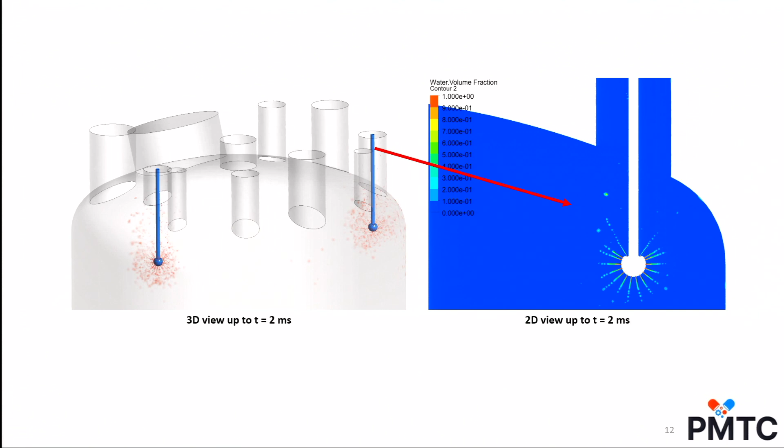So overall, to conclude here, we've been using computational fluid dynamics to predict the flow structures and the cleaning rates that occur within cleaning operations in pharmaceutical vessels. I showed you the effect of solubility, but it's not only solubility. We also have to think about flows. Does the flow wet the surface fully? What is the structure of the flow? How well can matter diffuse? How well can it be carried away by the solvent?

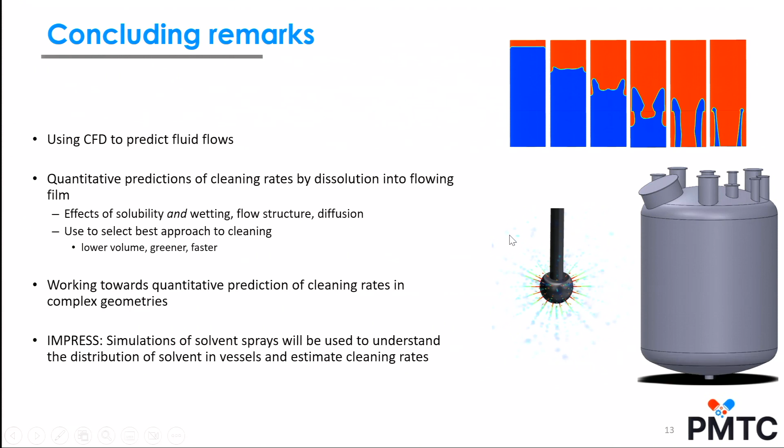And through that, we can learn how to clean better. Could we use a lower volume? If we flow faster, we might get faster cleaning. If we switch to a greener solvent, we might get slower diffusion and dissolution, but we can compensate for that by having a better cleaning structure, a better flow structure. Overall, we're working to predict quantitatively the cleaning rates in complex geometries such as a full-scale vessel, and that's the main ambition of the Impress project.

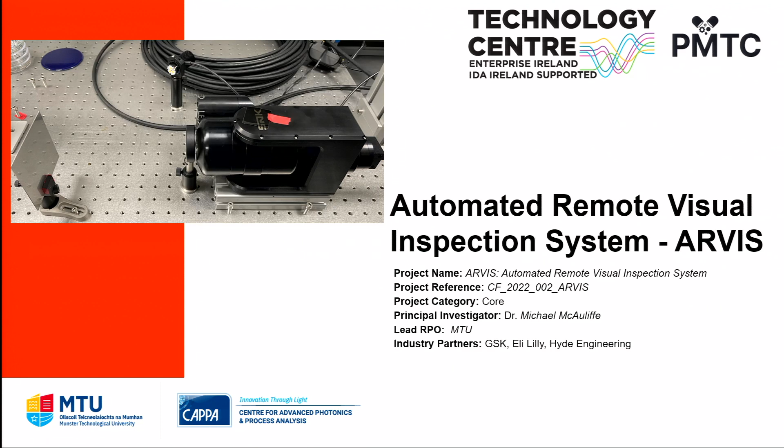So yeah, thanks very much, and thanks for the invite and having me here. I suppose Sarah mentioned already that this is part of the cleaning team, so it's one of the core funded projects we have within the PMTC. The project has a nice jazzy acronym called ARVIS, which stands for Automated Remote Visual Inspection System. I'll go through the initial design and how we're going to go about doing it. We're only a couple of months in, so just bear in mind there'll be some initial results when we get to that point. We have a couple of industry partners that are having input in terms of the asks and the design around the system, so they're listed there as well.

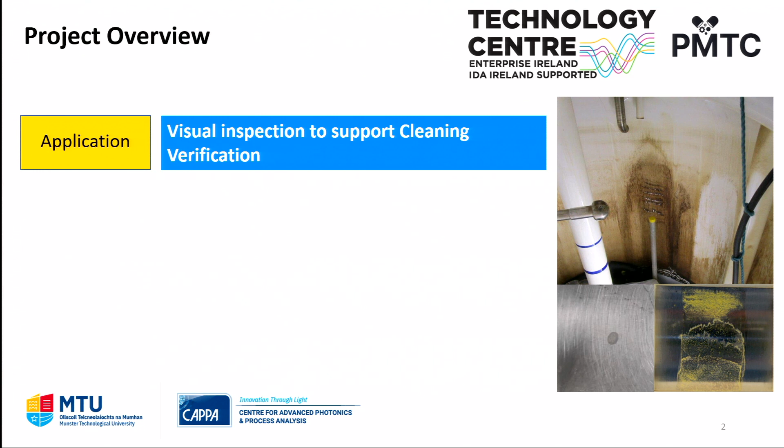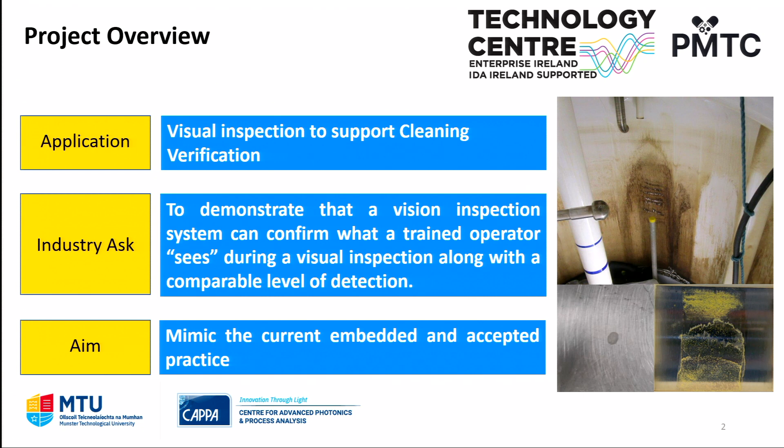So just to give a brief overview on the project, we've touched on visual inspection, and Ravi gave a good overview of what it is and how it applies to industry. The application we're focusing on here is support for cleaning verification in industry, and it's mandated that this is done to any vessel or production that has a product going through. So the ask by industry was to demonstrate that an automated or vision inspection system can confirm what is currently being done or seen by an operator or trained operator. We're looking for comparable levels of detection by demonstrating the camera system to an operator. So the aim is to mimic the current embedded and accepted practices established within various industries or companies, and to be comparable to the human eye, which is one of the strongest asks we've been given.

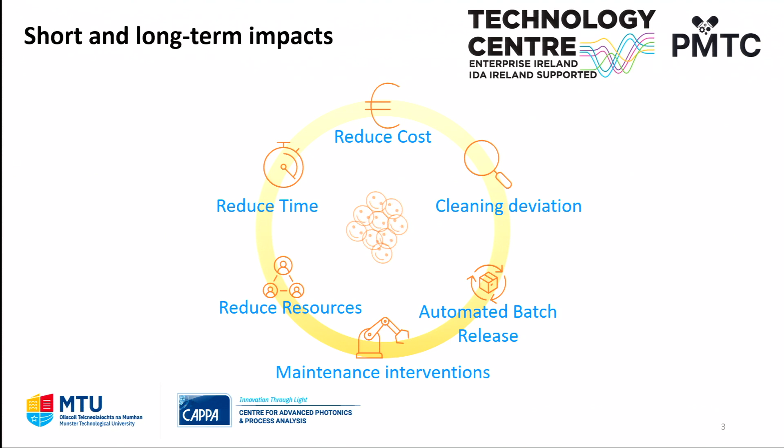So just to give some initial results and show the approach we're taking in comparing to a current system - and by current system I mean the operators. We've done a test where we've spiked or prepared samples with various substrate concentrations. We had two different observation positions, guided by an SOP that had been provided to us by an industry member.

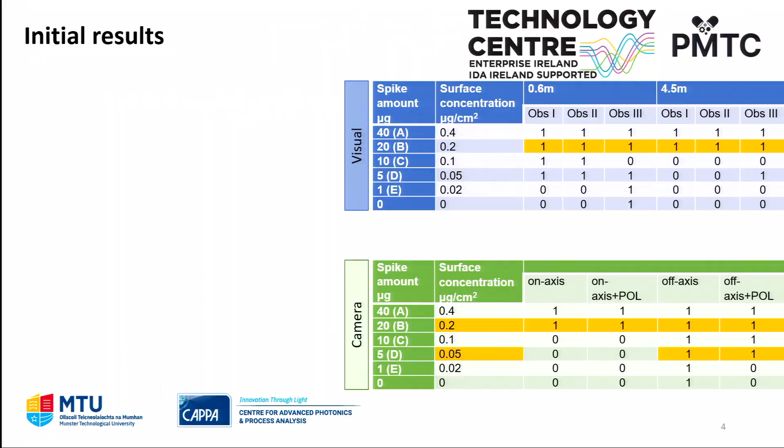Then we have off-axis illumination, where the camera is looking at the wall but you're using lighting from the side to illuminate at a different angle, and there are reasons for that. Overall, the results are comparable - the camera system has a visual inspection limit of 0.2 micrograms per centimeter squared, but we could achieve slightly higher with different lighting. We won't include this in the system, and there are reasons behind that - one being that we want to test this on a live vessel, and our testing is limited in that it's not quite ATEX rated, though it is suitable for immersion into a vessel. Whereas if we were to add on light sources and additional controls, there would be limitations on how much we could test.

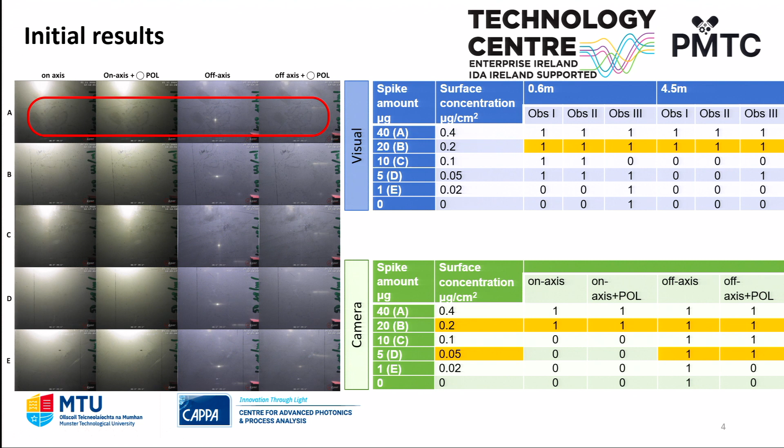So only those in the front row might have an advantage here - these are images captured by the camera. There's a poster somewhere with better images of these results, but you can see there's staining forming here, captured with the camera. These are really scaled down images, but you can see on-axis and off-axis, and the effect the lighting has on the substrates. You do get to a limit where you can't see anything visibly here, but by inspecting the images afterward, it's possible to actually see the stain still. So that's the progress we've made so far.